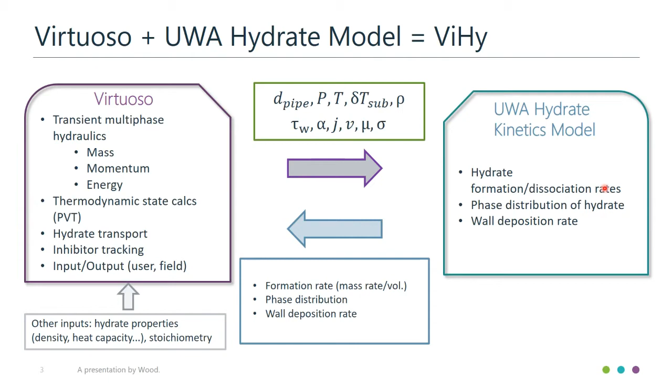So moving on, in terms of the scope of modeling itself, I'll just quickly touch upon what is included in the current version and what is not. From an inclusions perspective, we can model the transient multiphase, that's the Virtuoso part, and then hydrate kinetics, which is the UWA part, and then the hydrate transportation is taken care of by Virtuoso, and the inhibitor tracking, as well as the effects on the equilibrium temperatures, saturations, and surface tension.

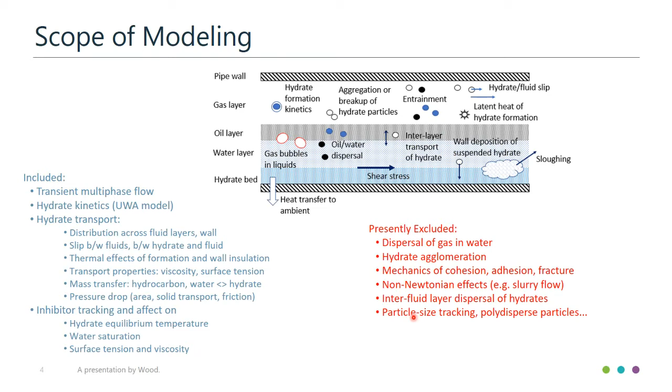Presently, the dispersal of gas in water and hydrate agglomeration and the cohesion, adhesion, and fracture, some of which Bruce has already touched upon, are not included yet, and also the non-Newtonian effects such as slurry flow, and interfluid layer dispersal of hydrates. So it is a work in progress, and as the code gets developed further, that integration will happen as time goes on.

So it is a closed loop system, but since there are pressure and temperature values available all along the line, and also at the inlet and outlet, we simplified this model in Virtuoso where we made it an open loop model. Essentially, it allows us to remove all the equipment which is not necessary to be modeled, and the effects of pressure increase at the outlet can be taken care of by time transient pressure as a boundary input variable. So that is still covered, but instead of having a full loop with all the equipment involved, we have simplified it to make it an open loop system.

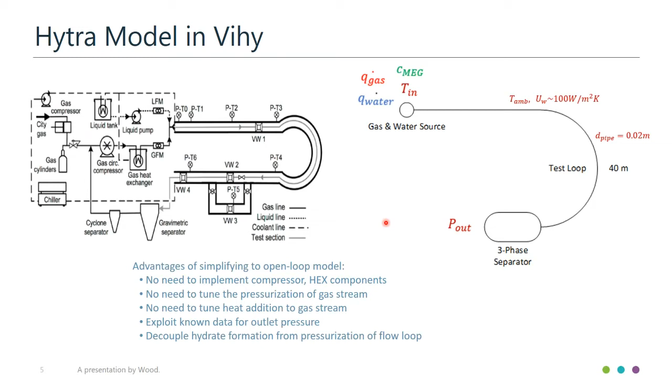So that's a very brief summary of what we covered until the last symposium, and this is the new work that we have embarked on. We've looked at one of our implementations of Virtuoso, which is actively monitoring a gas condensate system. It's a fairly big network with multiple wellhead platforms, and usually two wellhead platforms are connected into a single trunk line. There are about 4 trunk lines, fairly long distance subsea, but in not so deep waters.

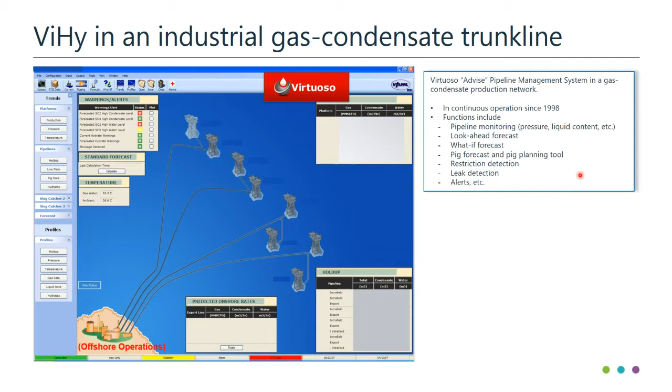We have a Virtuoso implementation on this which has been in operation since 1998, a fairly long time, and we've been maintaining it all through this. It's a full-blown pipeline monitoring system. All the operating conditions like pressure, liquid contents, temperatures are always monitored actively. It also has look-ahead forecast and what-if scenario functions embedded into it, as well as pigging planning tools, restriction or leak detection, and alarms or alerts.

So one of those pipelines has been taken for the study here, because there was an event at some point in time which was believed to be a hydrate event. So we took the data for that particular pipeline and started applying the ViHy model to predict whether the hydrate formation event can be replicated in ViHy, and to what magnitude and to what accuracy.

It's a 36-inch line, fairly big diameter compared to experimental setups of 1 inch, 2 inches. It's predominantly a gas production system with about 1 barrel per MMSCF of water loading at the inlet, and condensate loading of about 30 barrels per MMSCF. So in a 36-inch line, holdup would be roughly less than 5%.

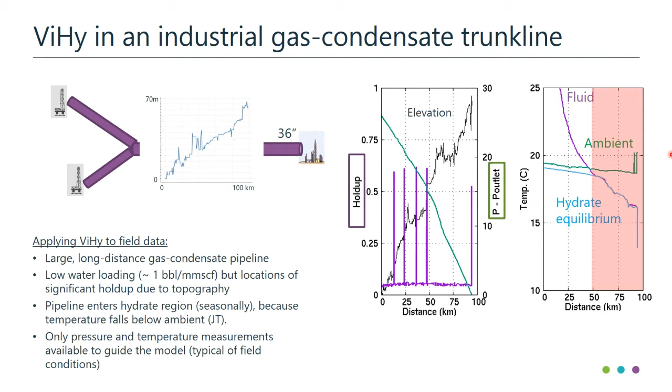So as it is entering into the winter season, at about the 53rd day or so, there was an event which showed that it was primarily because there was a drop in liquid rate. Sorry, or there was a drop in overall flow rate. So to say, the gas production has gone down, and then you see that Virtuoso actually predicted a pressure drop, which was almost in the order of about 12 bar, but the real field system didn't predict that, or didn't show that pressure drop.

So what happened there was the alarms were raised because there was an anomaly in terms of pressure. So it was perceived to be a hydrate event. So immediately the operator started injecting MEG, and because of the length of the line and the rate at which you can inject, it took about 2 to 3 days for the MEG to reach the point of interest, or the point of hydrate formation to be perceived, right?

So at that point, once the MEG came into contact, you can see that after a couple of days, when the MEG is supposed to get in touch with that hydrate location, the pressure started coinciding again, which kind of suggests that it was actually a hydrate event, and because the MEG was able to get to the location of interest, or to the hydrates, it started dissociating it. And obviously again pressures started aligning together.

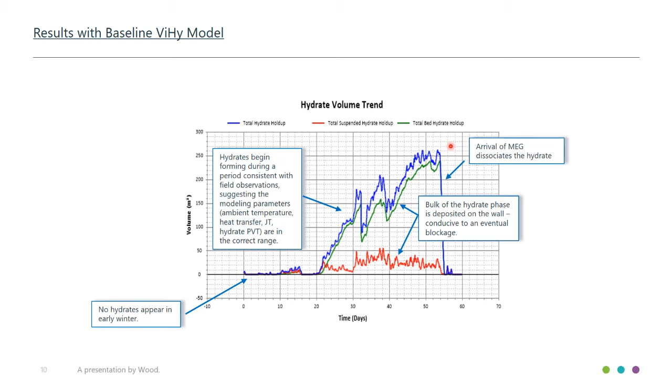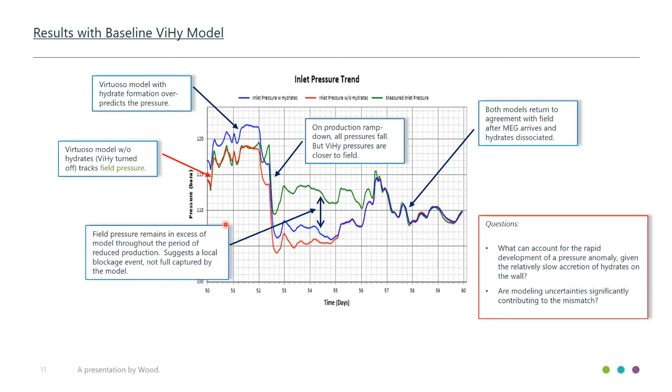Again, when the MEG was injected and it touches the hydrates and starts dissociating, everything falls in line. Now, this raised some questions for us, where we started thinking about what is causing this rapid development of pressure anomaly, because usually hydrates in such a big pipeline with such a low liquid content are not going to form immediately and block off, right? So then we started thinking about what other parameters within the model could create these anomalies.

So the different factors that could impact the hydrate formation as well as the pressure drop predictions would be hydrate wall adhesion or the adhesion forces, bathymetry discretization, the supercooling or the probability of hydrate nucleation, water loading, and also the entrainment as well as the particle size or the slip factors. So we started exploring each one of them as we went along.

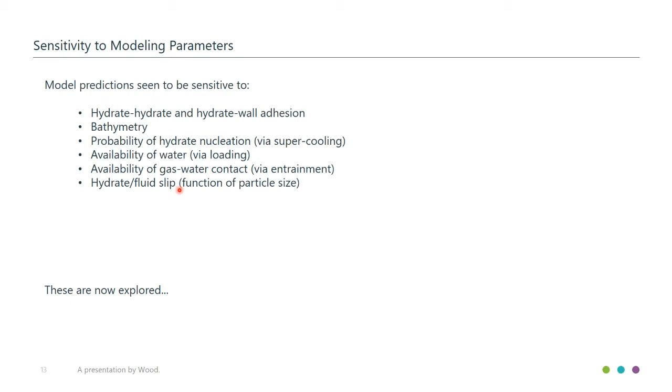So first one, we looked at the bathymetry. So we looked at initially the model which was set up for the production management system in the Virtuoso, the online deployment tool, had a coarser profile, which is indicated by this solid black line. So as you could see, over 95 kilometers, this is fairly coarse. But then that was enough to get an accurate prediction to match the field data. So that was always being used, and it is still being used in the system with no mismatches.

But then when it comes to hydrates, because of the localized water spots or the valleys where the water can actually accumulate, that becomes quite important. So then we rediscretize the pipeline with the finer profile as we got from the as-built data, which then shows that there could be significant pockets of water that can be held up.

But then there is another factor to this: even though the water is being held up in these valleys here, it might not be necessary that the hydrate formation temperature has been hit at that point. So why you don't see anything further downstream, even though there are valleys, is because that water has been consumed to form the hydrates. Because downstream of about 50 or 56 kilometers, it enters into the hydrate region. So there is a difference in the amount of water holdup, and there is a difference in the amount of hydrate volume that can be formed because of this.

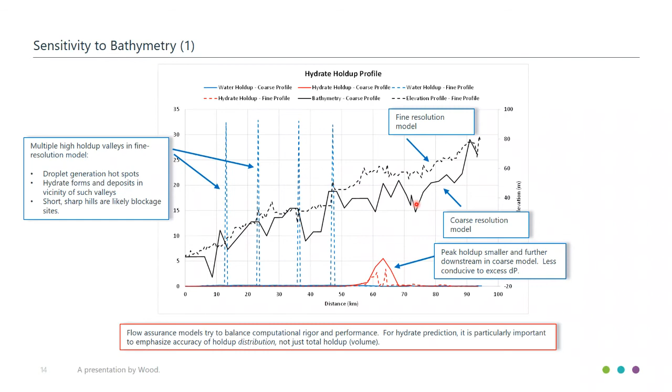So looking at the hydrate volumes, the coarser model actually starts forming hydrates earlier. Again, it's because of the way the water has been distributed in the system, depending on how the valleys have been put up. While the finer grid model is forming it a little later, as well as the volume doesn't start to go up until a little later than the coarser model. And also the hydrate dissociation part happens a little later in the finer model. That's because the MEG probably would have taken longer to travel along all the ups and dips to get in contact with the hydrates.

And it is quite apparent even in the pressure trends. So both the trends actually match together with that differential that was always there. But then after the event, or even after the MEG comes in contact, the trends do not match with the field data, especially the one with the finer model, because there is more water being held up. So there is more pressure drop. It's not really because of the hydrates itself, it is primarily because of the extra water that is being held up. So all of this will tell us that the discretization of the model is quite important to be able to look closely at where the water pockets are and where those hydrate blockage sites could be.

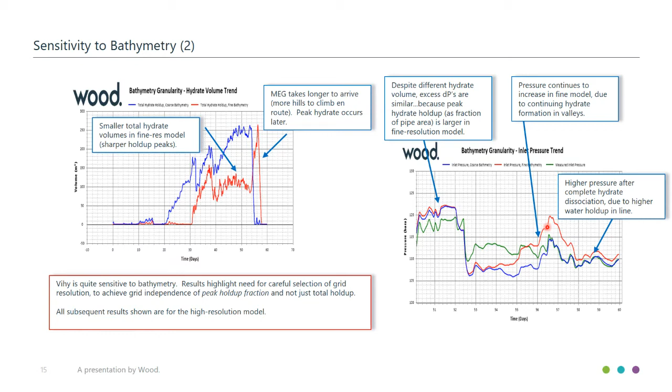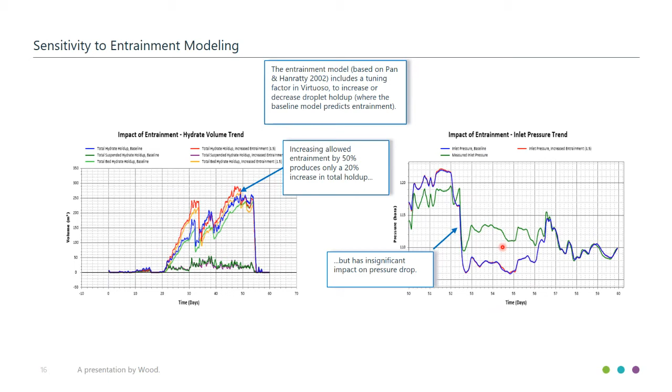And next up, we looked at entrainment. So instead of using the baseline entrainment as per the Pan & Hanratty model, we also tried to bump it up by another 50% to see whether it will have an impact on the overall pressure trend. It does have an impact, but it only produces an extra volume of about 20%, which is not sufficient to create any difference in terms of the pressure trend. So at this point, entrainment was not such a big factor for us to play around with to be able to match the field data.

So then we moved on to the next one, which is adhesion forces. So initially we started off using the previous version of the UWA code, where the adhesion forces were not sufficient to push the hydrates to deposit at a certain location. So what was happening was, if you look at this plot here, all the hydrates that were being formed were actually being maintained in the slurry phase, within the suspension, and they were being carried through the flow line and just flushed out of the flow line. So there was absolutely no deposit being formed, which is indicated by this green line at the bottom here, which is using the older version of the DLL.

Then upon close communication with UWA, we figured that probably the adhesion forces may need to be revised a little bit. So once those forces have been revised, now we start seeing a lot more holdup of hydrate depositing on the wall, which is the yellow line. Pretty much most of the hydrate that is formed is actually being deposited onto the wall, and only a little remains in the suspension. That also is corroborating pretty well with the pressure trends.

So with the old DLL, although it was lower, as we increase the adhesion forces, because there is more deposition being formed, it is continuously predicting a higher inlet pressure all the way through, not only at the event duration, but also all across. So there is a difference in terms of the pressures during the events, and there is an excess DP that is predicted.

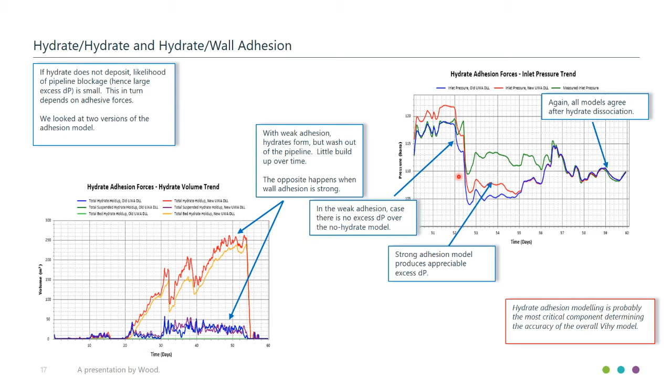So again, adhesion is one of the key parameters that we need to look at, and it is one of the uncertainties that remains. The next one was about the water loading. This particular system was supposed to be 1 barrel per MMSCF of water loading as the production comes into the inlet. But it is not recorded on a continuous basis, and there have been indications that it could go up to as much as 3 barrels per MMSCF.

So we went ahead and did some additional sensitivity with increased water loading. The water loading was increased at about the midpoint of the simulation, at about the 30th day. As soon as we increase that, obviously more water is coming through, and also more hydrate is being formed. When we compare that against the field data for inlet pressures, there is a big jump in the overall pressure trend, which continues all the way through the simulation. Although there is more hydrate, it's primarily because of the additional water that is being loaded.

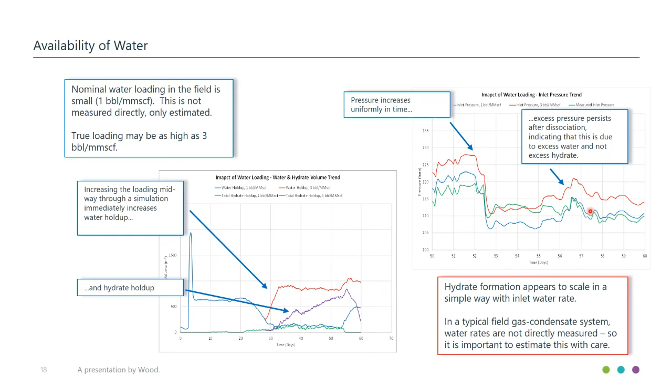Most systems may or may not continuously track the water loading, so we need to be cognizant that there could be variances in the production coming into the system, and the predictions can be off. Now, I would like to touch a little bit on the stochastic nature of hydrate nucleation itself. This was work from a paper done by one of my colleagues, Hooman Haghighi, as well as Professor Tohidi, who is also online, I suppose. It is a bit modified version, but just to give you a sense of the stochastic nature I'm talking about.

But dissociation, on the other side, is much warmer compared to the formation side. Typically for gas condensate systems, it could be in the order of about 3 or 4 degrees centigrade between hydrate formation and hydrate dissociation. Although you are in the hydrate zone, you might still need additional subcooling or supercooling. That's what we are terming supercooling within the hydrate zone to be able to actually form hydrates. So there is always going to be a hysteresis effect there.

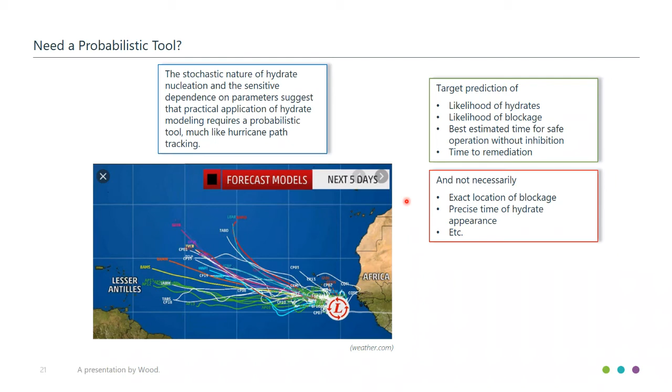So to further corroborate the feasibility of using it as a probabilistic tool, we went ahead and performed an ensemble of simulations, about 7 different simulations, which were all performed for a duration of 24 hours, varying only one parameter at a time and with the same initial conditions to start with. What we varied here was a range of supercooling, 1 degree, 2 degrees and 3 degrees, and also a 1 degree shift of the hydrate curve itself versus 1.5 times, which is a 50% increase of entrainment, as well as the slip factor.

Now in all of these, what we can see is there is a fair bit of scatter of where the hydrates form, as well as the volume of hydrates that are formed. It is in the order of about 40% for peak hydrate location, and about 50% for peak hydrate holdup. But the hydrate volumes in themselves were fairly good in the prediction, and they follow the trend that we expected. And although it is not presented here, the inlet pressures in all these conditions were in fairly good match. So all of this again corroborates the fact that it must be more of a probabilistic tool rather than a deterministic tool.

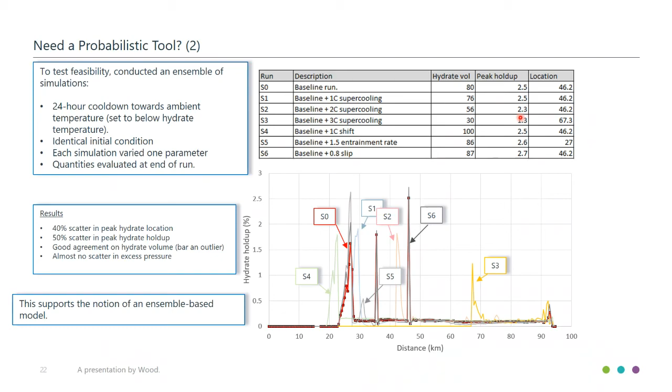So now here I would hand over to Bruce to talk about some of the developments. Ready? Thank you for that, Leap. So as Leap has mentioned, probability is very, very important, and we'll be hearing a full presentation from Mark on that a bit later on. In the meantime, I just wanted to quickly go through some of the updates to the actual underlying mechanics of the model.

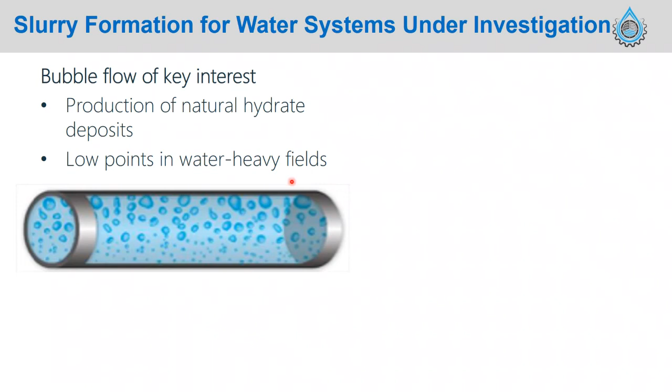I spoke a little bit about that at the end of my presentation, but in addition to that, and of particular relevance to both natural hydrate production and also any low points where you have a substantial amount of water, is the idea of what happens in bubble flow. This goes back to the work we saw previously that Shinsuke had been doing, in that if you have these bubble flowing systems and you have conversion of each of these individual bubbles within that system, you have to have some idea of what effect that's going to have on the slurry viscosity.

So can we see blockages occurring? Can we see restart and these sorts of things? So what we actually wind up finding is that for these bubbly type systems, you tend to form networks of hydrates, which can cause jamming at reasonably low volume fractions.

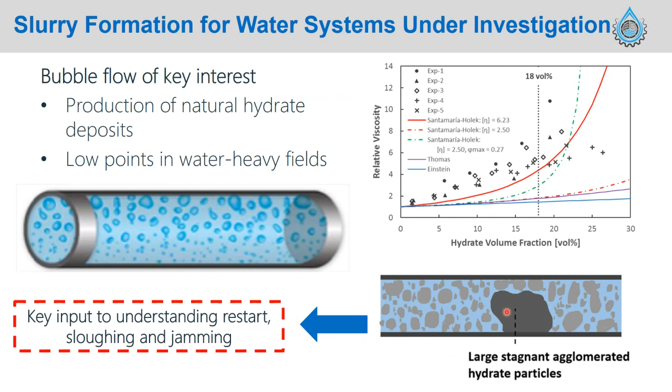And our idea here is that essentially you may have these deposits forming. Again, that's a very important point. And then as you have numerous converted bubbles and hydrate particles coming into these stagnant zones, you can very rapidly wind up with these jamming or sloughing or all of these different phenomena which can suddenly and probabilistically lead to rapid blockages of the sort that we see in the very sudden change in pressure drop data, for example. So this is really going to be key to bringing in the ability to model these sorts of phenomena.

Now, if we talk just quickly about how we might go about incorporating deposit movement into these simulations, this is again another figure from one of Shinsuke's papers, which is currently under review, looking at, for that water dominant system, what is the critical shear stress required to begin moving a deposit which exists within a pipeline. So you can see, as you would expect, as you get more and more hydrate, it becomes more and more difficult to actually start moving that deposit and restarting the entire pipeline.

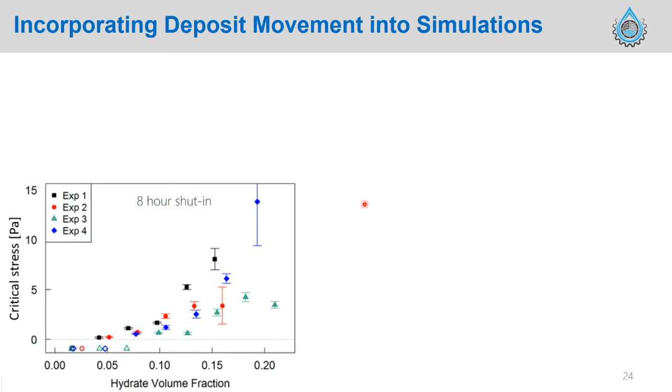And we looked at a range of different things. For example, the nature of the restart. So do you ramp things up very quickly? Do you linearly increase that pressure drop ramp across it? And I'm hopeful that you'll be able to read about that in the paper, which is coming out shortly.

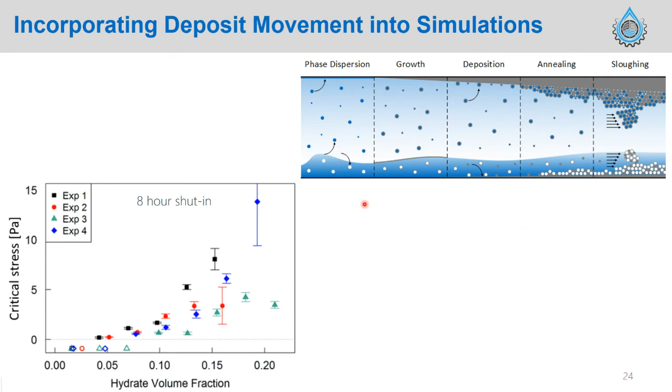So what we can start to do is to take information from the experimental apparatus. We can compare it also with what our models are putting out in terms of that shear, and also with other fundamental experiments done on the actual strength of these hydrate deposits to get some idea of when our sloughing might actually occur.

Now, that's only sort of half the story, the ability to do that within our extension. The other half is the ability of the multi-phase tool that we talk to to actually support that. And that's been a real joy, to be honest, working with the folks at Wood, in that they've been very responsive to the needs of putting in these new mechanics. So if we find something which isn't perhaps modeled in the way that we would like it, then we can talk to the guys at Wood, and they're very happy to look at incorporating this within the simulation tool.

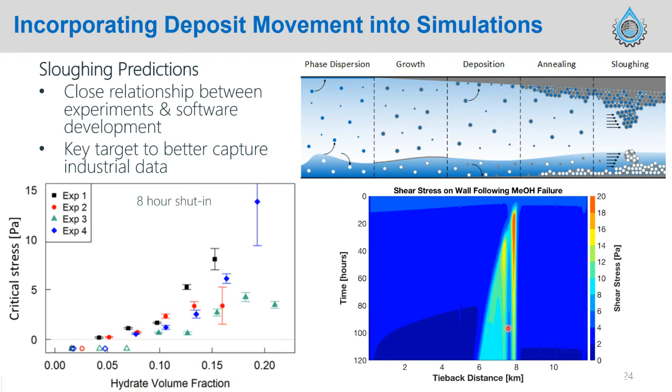So that sort of relationship of working out what are the new mechanics from the hydrates perspective, and then what are the requirements within the flow tool, is something which has been very useful and will be very useful in the future in continuing to develop ViHy. So I just wanted to bring those 2 points up, and now we'll have a look at the conclusions.

Thanks, Bruce. Thanks for that summary up there.

In conclusion, I would like to say that from the first phase of the study, we were able to achieve a stable, numerically good simulator, which is tightly integrated with Virtuoso and the UWA Hydrate Kinetics model, which is able to predict all the leading order physical phenomena that we expect, which is multi-phase transport, thermal effects, wall deposition, and effects of inhibition in a fairly good sense, and with good validation and testing that has been done against the experimental data.

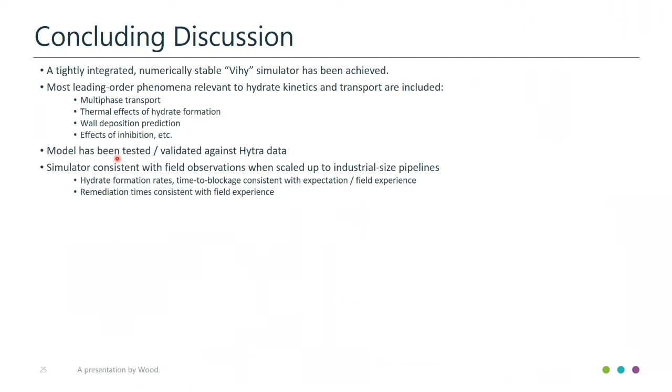Going forward, what we are looking to do is further detailed modeling of gas dispersion in liquid slugs, as well as water dispersal in oil, and from the Hytra data also looking at the correlation of timing as well as location of sloughing or the slurry effects that probably will be incorporated in a future time.